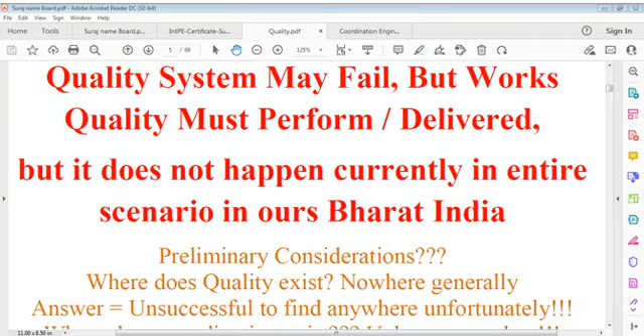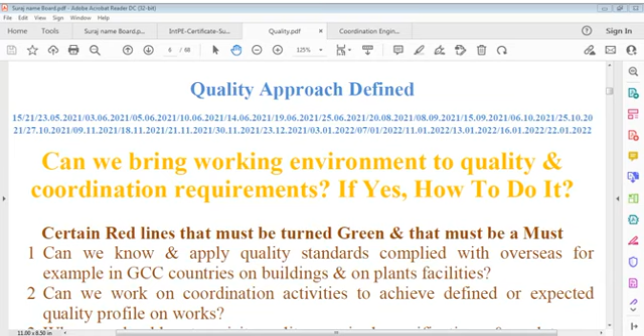Previously it was understood that the system is more important than quality, but time has told that no, there is a red line that we have to go. Can we bring the working environment to quality, the required working environment and coordination requirements? If yes, then how? So there are certain red lines that we have discussed before also. We'll keep on discussing them together, but the question is not here.

The question is something else. We have to link all this to, you can say, coordination and engineering. Coordination engineering, which everybody knows, meaning we know, but we do not know the reality of coordination. Coordination as a technical word, engineering word, or scientific word is very important.

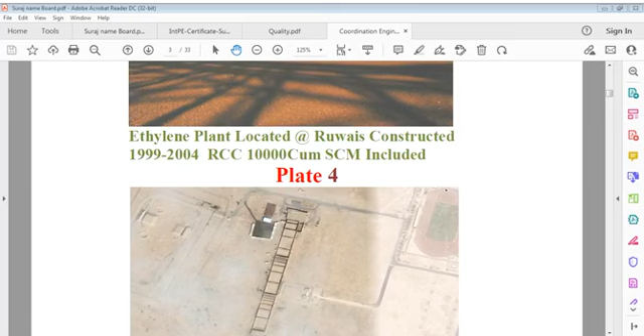So we have to learn the technical aspect first. And coordination includes the technical aspect, don't forget that. In this project there were so many elements. Now we go to this plate; I'll come back to other points. I put a sequence. Plate 4 gives the process area for the same project, same plant, and you can see in this process area there are many equipments and many areas available.

You can see these roads inside, and in certain parts there's the cracking compressor, the cracking system, or you may say also the wash water system. So many systems are available there; it's kind of an area with many groups of machines. And also you can see a water body called the seawater basin, a water body called the lagoon, and a water body called the outfall structure.

You can find so many buildings inside the process area, for example the central control building, and also electrical supply stations, that is main supply stations and sub main supply stations. And then there's a huge work of piping and pipe racks, and there are so many steel buildings in the same area. Steel building means having equipment indoors to protect it from the impact of weather.

Likewise, there's another part which is not seen here, that's the administration area and warehousing. This is only the process part, in which a multitude of utilities are also available, and off-sites also. So for me it was also a learning site. By chance I got many chances which I could not get otherwise at that age, and it was real work experience.

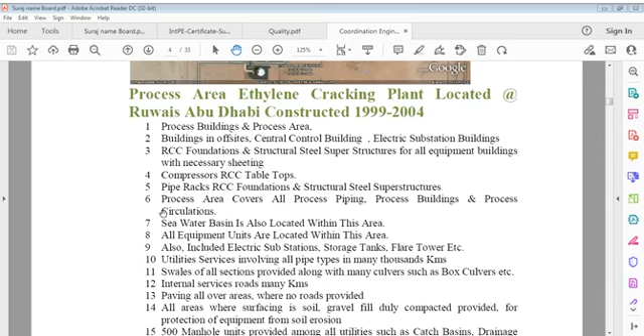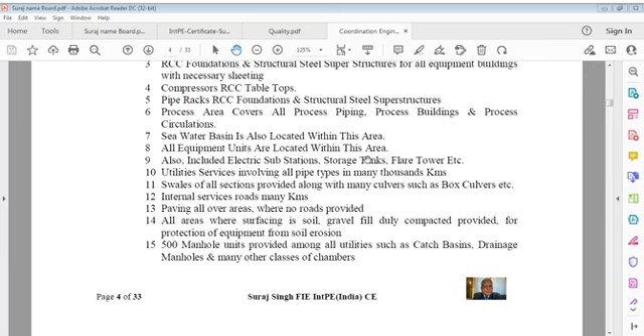The process area covers all process piping, process buildings, and process circulations. All these were there, and therefore it was important. The seawater basin is also located within this area. All equipment units are located within this area.

All utilities include electric substations, storage tanks, flares and the flare tower, and utility services involving all pipe types, many thousands of kilometers. Swales of all sections provided along with many culverts, such as box culverts. Internal service roads of many kilometers, paving all over areas where no roads are provided. All areas where surfacing is soil have gravel fill duly compacted, provided for protection of equipment from soil erosion.

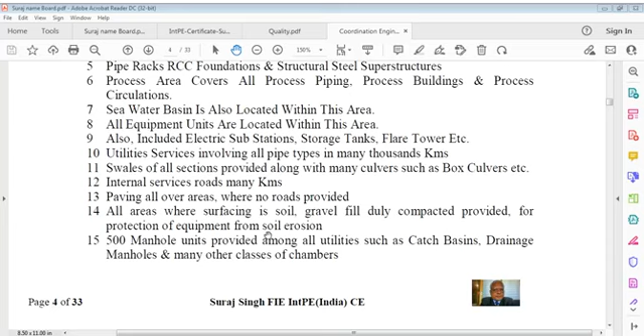And more than 500 manhole units; I don't exactly remember now how many. I personally dealt with shop drawings and all studies for these manholes. These units were provided among all utilities, such as catch basins, drainage manholes, and many other classes of chambers. So that's one.

This is also a processing unit, and there are so many buildings in this area which are very important. Central control, this is all process area, and there are some buildings here we call off-sites and utilities, and here, wherever processing goes on, that's on-site.

This has major foundations, massive blocks, independent footings, and likewise strip footings, depending on what building it is. And there is the compressor area here. In the compressor area is a cracked gas compressor, ethane compressor and propane compressor.

The seawater basin, which we'll discuss just now, and the electric substation buildings, likewise. And such tanks are there, major tanks, and many gases are involved to be stored in them. And there's a seawater basin here. There is a water lagoon here, and of course, the outfall chamber is here. A warehousing here, and you can say the administration block here. Likewise, this

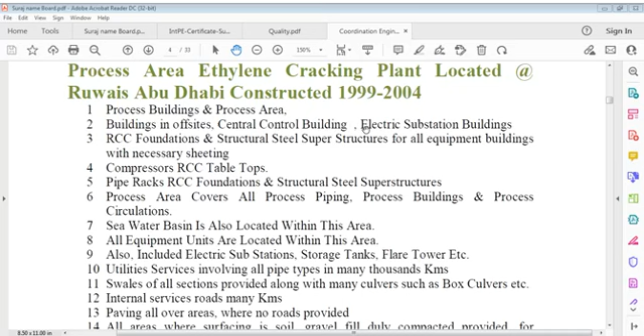just for information. And what's written here is process area, ethylene cracking plant, located at Ruwais, Abu Dhabi. I have told you that very limited contents are given, not full. You can say process buildings and process area means you have to deal with buildings while you construct something, and process buildings are very important, particularly in the process area where we talk about

blast. Blast is not written here, but it is very important. Blast means where there's some fire, some explosion during the processing stage. This blast can impact your structures and everywhere, and because of chemical process flow, there can be chemical fire as well. Because of chemical presence, it can break out into a new kind of fire, and the question is you will lose people, lose resources and everything.

So blast and non-blast buildings. In the process area generally buildings are blast buildings. Up to 200 meters it is a blast resistant building, and going beyond that, 200 to 600 meters, they are called intermediate buildings, or blast resilient buildings up to 600 meters, and beyond that, non-blast buildings. So just for information I explained that, we can refer to that one.

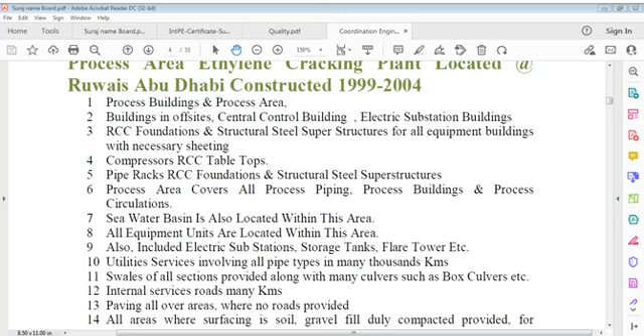Some knowledge is essential. So, the compressor tabletops: the top beam and foundation were very complicated, but we did that successfully. Then we have pipe racks with RCC foundations and structural steel superstructures. They can be precast also, or concrete, no problem. It depends on what you are going to do; that's the designer's choice.

Then the process area covers all process piping, process buildings and process circulations, and all elements installed and used in the process area. Piping is very important, process buildings are very important, and process circulations are also part of process area work. This is all done in a responsive fashion, and all equipment used is also located within this area.

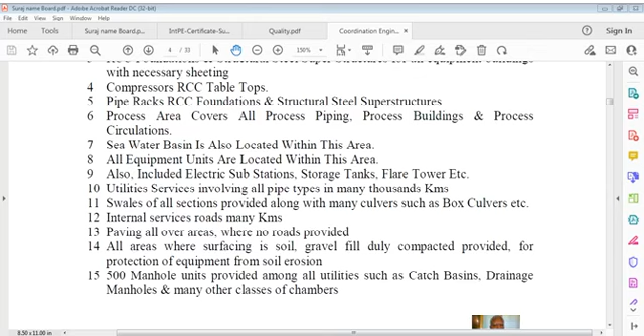What equipment we have to employ, and we can also include electrical substations for power distribution at different levels, as I said earlier. Hence, all equipment used is located in this area, including electrical substations, storage tanks, flare tower; all this is shown to you. You can see here.

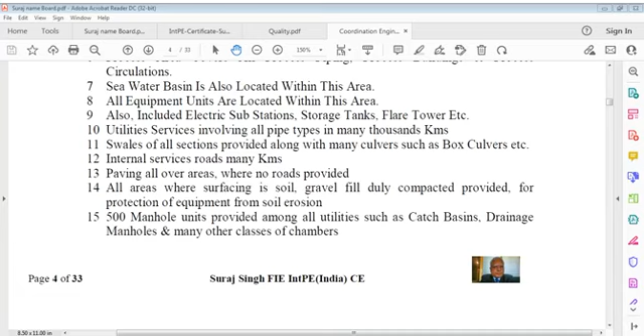Then the next plate, I think the first one is gone. We're talking of utility services, and it's a very important item. Utility services means all pipe work below ground, maybe above ground as well. Below ground we have drainage system, sewer system, gas system, or some other system, and you have to supply water.

There can also be chances of complications. Those complications must be avoided, because if not, it won't continue. If we don't take care of that, we may even burn our pump without knowing what the problem is.

We can say utility piping was such here that so many clashes happened among those services in comparison to the foundation of that area. In many cases designs were revised, in many cases coordination was changed.

So we have utility services, which is a very complicated part: electrical service, water supply, sewer service, catch basins, drainage. There were ductile iron pipes, GRP pipe, GRV pipe, and also concrete pipes; stoneware pipes were not included.

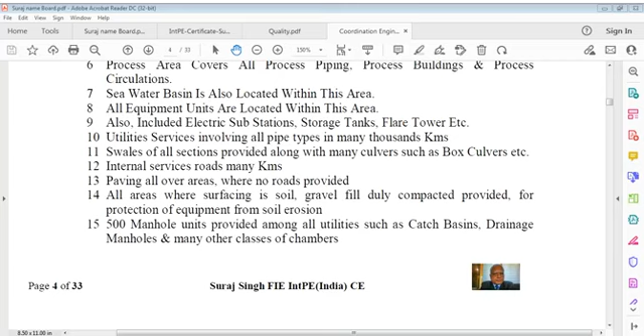So these are the points that I've discussed at length, and I have played slide 6 here. It's a swimming pool plate. Sorry, not swimming pool, sea water basin. I used to say swimming pool because I constructed a swimming pool.

I'm feeling cold now, I don't know why. Maybe it's cold outside. Let me see the temperature here, for example Haryana. Now it's 1 degree down. When I started at 3:30 it was 12 degrees, now it's 11 degrees, and humidity is 96%. Day temperature is 16 degrees, night time showing 6 degrees. Well, no problem, let it be. Waste of time, just come to the point. Let me wear my coat first. It's better than getting cold.

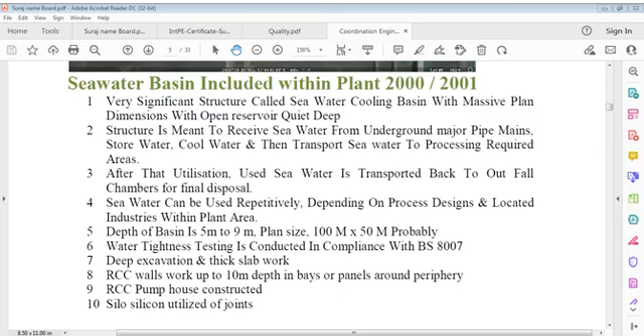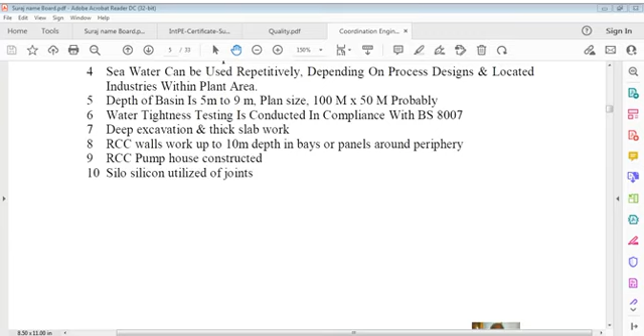The joints are to be made of silicone material, chemical material, and that's the specification of this. So you can quantify how much it is. It's very much quantity. I forgot to write it, but it can be 5,000 square meters area. If you take a 40 centimeter base slab, 5,000 square meters gives 2,000 cubic meters. And the walls are 300 meters periphery, forget the pump house, about 40 centimeters thick.

So 300 into 0.4 is 120 square meters, into depth, let's say 6 meters average, or even more, say 7 or 8. So 120 into 7 or 8 is around 1,000 or 1,200 cubic meters of concrete in that.

It's a good quantity. And then the pump house likewise, and the quantity of water itself, you see how much that is. Let's say 5,000 square meters into 5 meters, or even if you keep 4 meters, it shall be 20,000 cubic meters.

So 25,000 cubic meter storage of water. It's a big one, and you can say cubic meter, that is. Whatever it is, quantity is not a big issue. Here the question is what to do, how to do it.

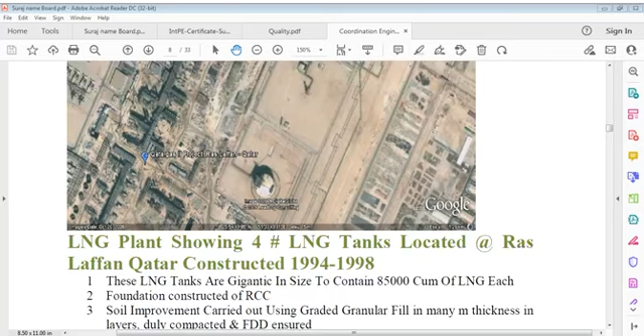Well, this is the LNG project, and I was an office engineer on this project in 1994 to 1998, I think. LNG plant showing 4 LNG tanks located at Ras Laffan, Qatar. LNG plant, liquefied natural gas. So in Ras Laffan, I was associated with Mid-Mac, who was a consortium member. We worked together with them on the site.

It was important; in fact, these LNG tanks are gigantic in size, to contain 85,000 cubic meters of LNG each tank. Foundation constructed of RCC. Soil improvement carried out using graded granular fill in layers, duly compacted to the required FDD,

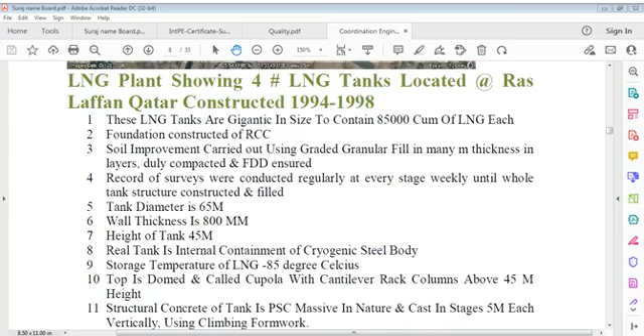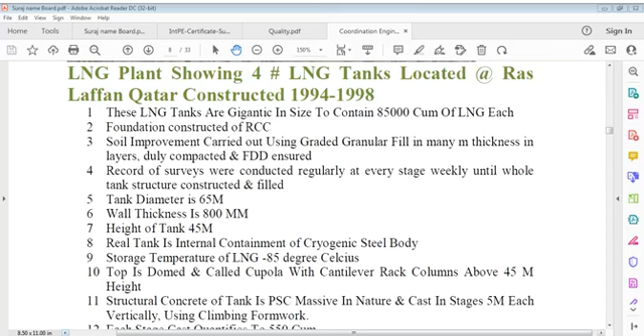And with cantilever rack column, and above 45 meters in civil practice. We have here, you can say, structural concrete of the tank is pre-stressed concrete as well as reinforced concrete, that is structural concrete. Tank is PSC, massive in nature and cast in stages of 5 meters each, and vertically, using climbing formwork.

Here each stage cast quantity is 550 cubic meters. Wall casting, talking of wall with climb form, climbing jump form. Each height is 5 meters. They were casting a slab also, roof slab, which we did not mention. This casting of roof slab is important. And the point is safety instruction.

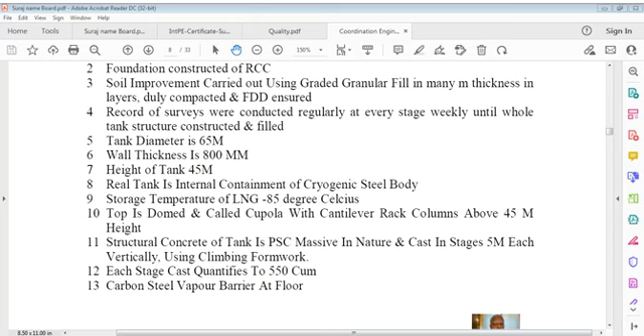It's an interesting one, just to know some statistics about that. Each stage quantity, as I said, 550, walls, carbon steel vapor barrier at floor, and we are going now to this engineering world, just to know what it is, how it works. Yes, engineering world, how does it work, how shall it work, what's the purpose? We have to know this in fact.

Last time I talked of certain procedures which we have to do during construction or during execution stage of contract. Coordination is a very complicated activity, not in a sense that it can't be done, in a sense that we have to understand what is coordination. We have to understand what is coordination, how does it apply, how does it work, and where we have to take care of this.

Now, for that purpose, I had referred you to some procedures, which I will again go to before moving on, because this is a very detailed statement I am making. That is coordination process, coordination requirements, communication process, communication requirement.

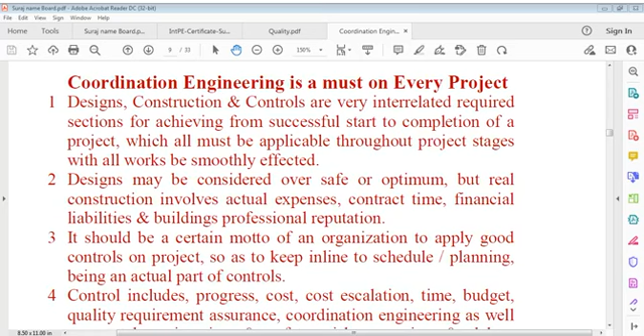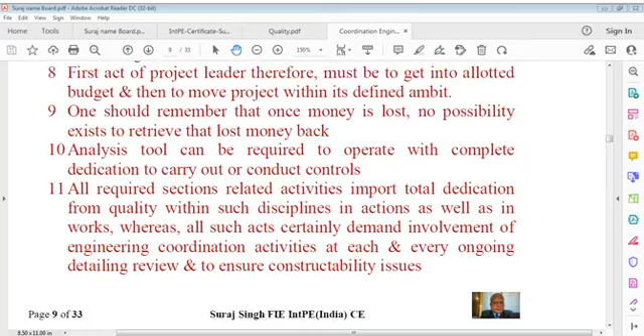Likewise, what grade of other items, what quality items you want, you have to give specification requirements that make quality in itself. Your specification speaks of quality, and that's a really important item. So I try to elaborate on bill of quantities, and I try to elaborate on specifications, and this is a very important part of the project, because this makes the quality system, and we cannot just run away from that.

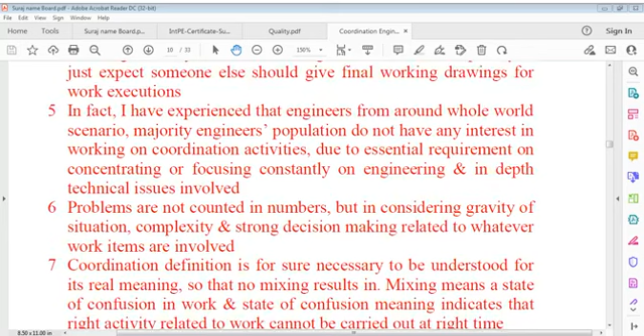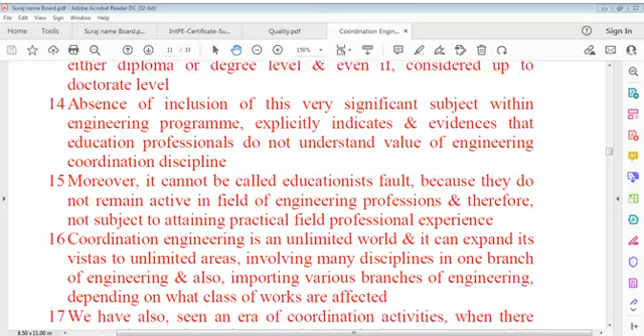Last time I explained something about this, so I'm just now browsing. Many people don't understand what coordination is, but it's not a question of whether they understand it or how to do it. Coordination cannot be avoided. It's a practical part of projects. So if you try to avoid that, you try to avoid the project itself. We claim that in the absence of coordination, you cannot do anything. That's also true if you're an experienced engineer.

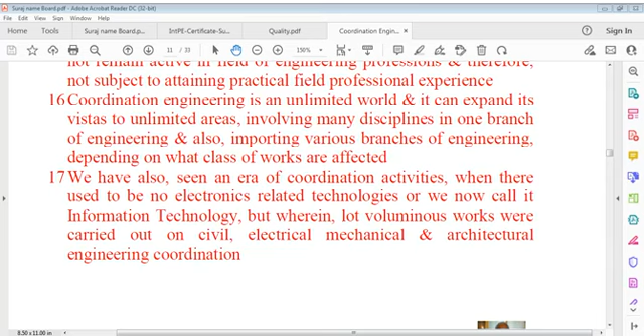You have to do that, because coordination engineering is an unlimited world. It can expand its vistas to unlimited areas involving many disciplines in one branch of engineering, and also importing various branches of engineering depending on what class of works are affected. We have seen an era of coordination activities when there were no electronic technologies, what we now call information technology, IT, but wherein large voluminous works were carried out on civil, electrical, mechanical, and architectural engineering coordination. And that's very beautiful.

You can say coordination engineering has achieved growth, but we don't have coordinating system engineers, we don't have coordinating systems professionals. That's a requirement of the time. In that era, works of coordination were very time consuming, due to the fact that even drawings used to be manually drafted, but that time has gone now. That's history. Now drawing is not that difficult, but understanding of details is a question mark.

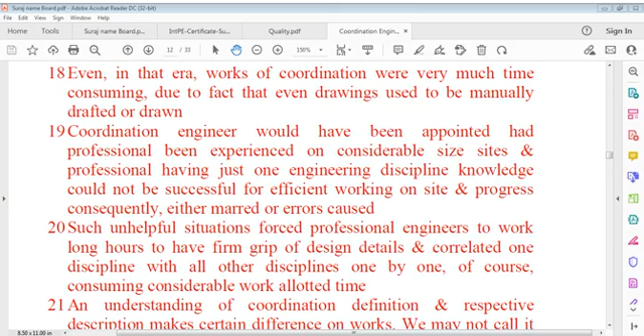A coordination engineer would have been appointed had the professional been experienced on considerable size sites, and a professional having just one engineering discipline's knowledge could not be successful for efficient working on site, and progress was consequently either marred or errors caused. Such unhelpful situations force professional engineers to work long hours to have a firm grip of design details and correlate one discipline with all other disciplines one by one, of course consuming considerable allotted work time.

So an understanding of the coordination definition and respective description makes a certain difference on works. We cannot call it teamwork. Certainly, I don't say it is teamwork, because coordination cannot be done effectively by a team, but certainly by perfectly getting through all related details available in schematic designs as well as other documents, and of course prevailing professional market conventions, or so-called good industrial practice.

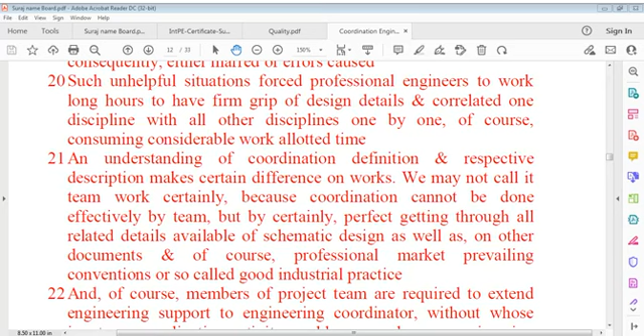Members of the project team are required to extend engineering support to the engineering coordinator or coordination engineer, without whose input no coordination activity would move. The engineering professional involved in every coordination has to consider personal involvement in every provided information for the purpose of corroborating ratification or providing corroborated information based on total scrutiny as well as investigation. The question is the coordinator. What is coordination? What is the specification of a coordinator? Is it only that you have to coordinate or to put something

or whosoever? And if that time is limited and I cannot afford it, in that case I can propose my solutions. I can say, okay, we want to do this. But for that, you have to see that your budget is not exceeded. Whatever provisions you have made in that item should not be exceeded. So you can say, okay, this was a requirement or this is a confusion. Either I clarify which of these three clarifications is to be done, or you provide your clarification, or you instruct us what to do.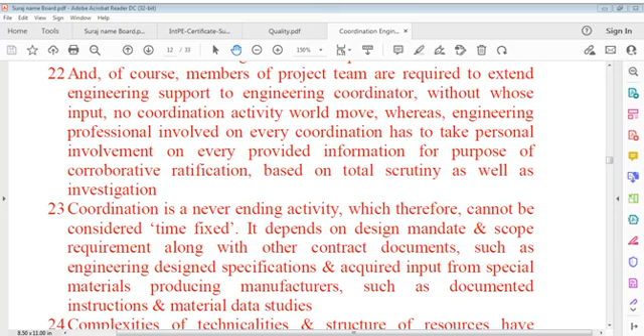And that's why I'm saying coordination is part of design. It's more than designs. It supports designs, or it overarches designs. Even sometimes designs are part of coordination, because the designer has to coordinate what's to be done and not to be done. So I can say coordination is a never-ending activity, which therefore cannot be considered time fixed.

We cannot fix time for this activity because always new information arrives, and it depends on design mandate as well as scope requirement along with other contract documents such as engineering design specifications and acquired input from special materials producing manufacturers, such as documented instructions and material data sheet studies. I repeat this point. Coordination is a never-ending process. It continues always, even if sometimes it's not seen going on. It goes on and on.

In terms of office work, a person as a coordinator keeps on working all the time, keeping an eye on what's coming in and what's gone, and what are the pending activities, keeping all the balance. That person knows what's to be done, because he doesn't coordinate only technical, he coordinates contractual coordination as well.

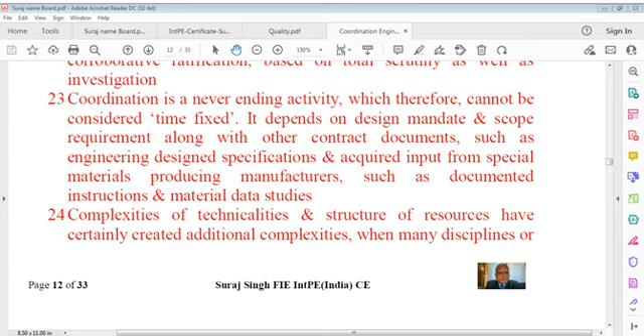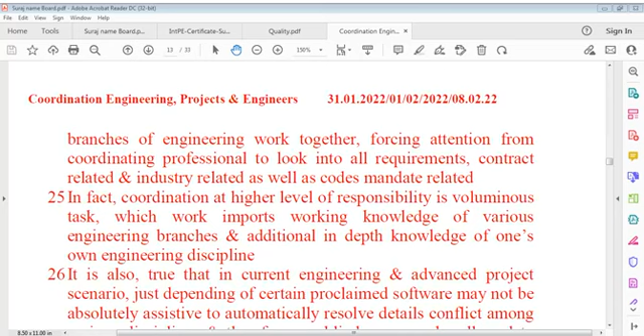So you can say coordination is never-ending activity which therefore cannot be considered time fixed and depends on design mandate and scope requirement, along with other contract documents such as engineering design specifications and acquired input from special materials producing manufacturers, such as documented instructions and material data sheet studies. Complexities of technicalities and structure of resources have certainly created additional complexities when many disciplines or branches of engineering work together, forcing the coordinating professional to look into all requirements, contract related, industry related, as well as codes mandate related.

In fact, coordination at higher level of responsibility is always a voluminous task which imports working knowledge of various engineering branches, and additionally in-depth knowledge of one's own engineering discipline. This is also important where something is impacted upon animals or non-human creatures. That can also cause a problem if they don't understand anything. They just want to enjoy life and eat and drink, sleep.

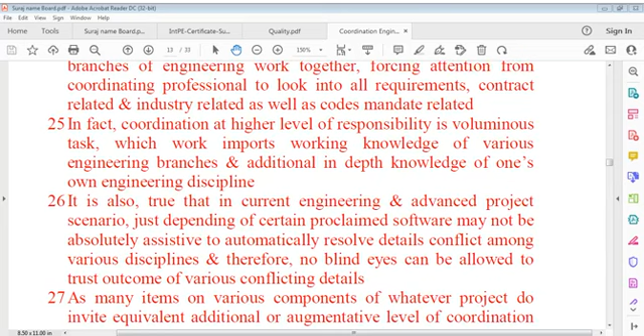And so it's also true that in current engineering and advanced project scenarios, just depending on certain proclaimed software may not be absolutely assistive to automatically resolve detail conflicts among various disciplines, and therefore no blind eye can be allowed to trust the outcome of various conflicting details.

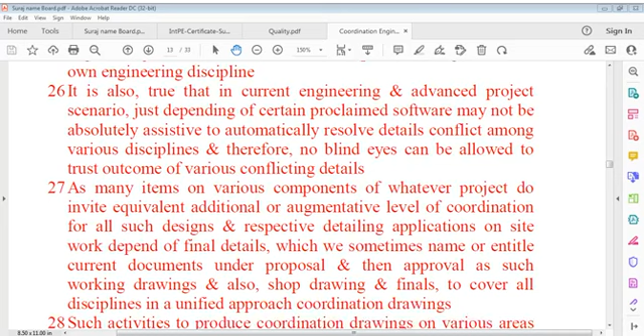It's only coordination, engineering coordination or technical coordination, or you can say on site what happens, they have to decide. There can be equivalence, as I said, in items. As many items on various components of whatever project do invite equivalent, additional or augmentative level of coordination for all such designs and respective detailing.

Applications on site work depend on final details, which we sometimes name or entitle current documents under proposal, and then approval as such, working drawings and also shop drawings and finals to cover all disciplines in a unified approach, coordination drawings.

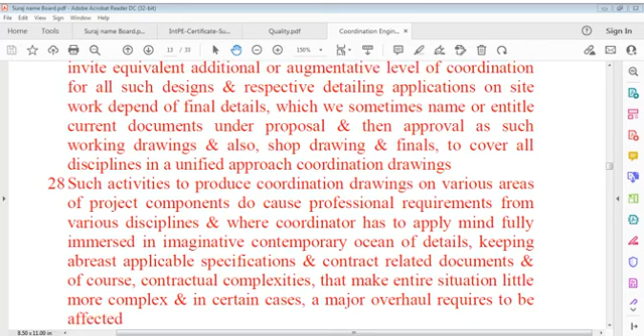Such activities to produce coordination drawings on various areas of project components do cause professional requirements from various disciplines, where the coordinator has to apply mind, fully immersed in an imaginative contemporary ocean of details, keeping abreast of applicable specifications and contract related documents, and of course contractual complexities that make the entire situation a little more complex, and in certain cases a major overhaul requires to be effected.

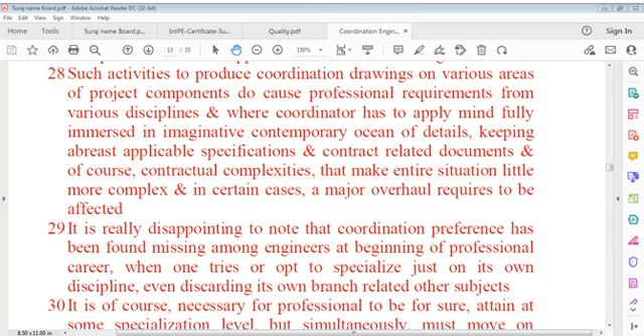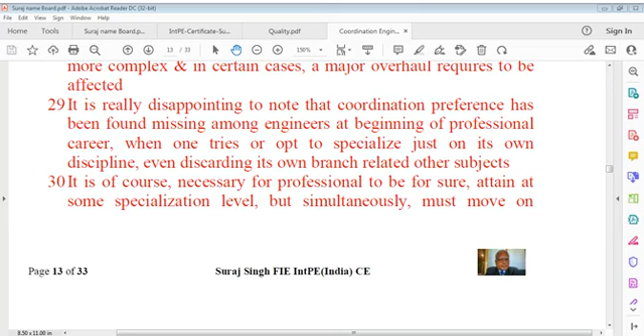It's really disappointing to note that coordination preference has been found missing among engineers at the beginning of their professional career, when one tries to specialize just in one's own discipline, even discarding one's own branch related other subjects. Of course, it is necessary for a professional to attain some specialization level, but simultaneously must move on a parallel track with the remaining disciplines, and certainly try to join other overlapping engineering branches.

Now, first of all, for contracts, because these are all parts of contracts, we should know the contract base. What is a contract? We know what a contract is, but its legal implication we don't understand. Engineers have to understand that. They know there exists a contract. Maybe they use it, but whether the contract is perfect or not, that must be evaluated. Because sometimes those who never worked in the field, but only in the design section, there will be something for them in a different way. We'll take that up later on.

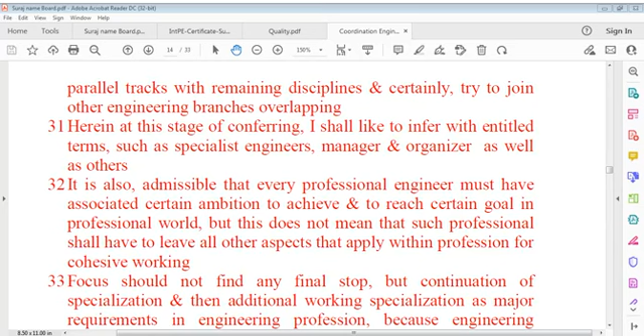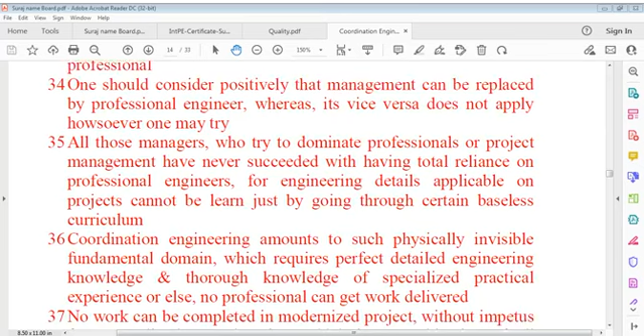Now, focus should not find any final stop, but continuation of specialization and then additional working specialization as major requirements in the engineering profession, because engineering cannot be replaced or overtaken by any other non-engineering professional. One should consider positively that management or organization can be replaced by a professional engineer, whereas vice versa does not apply, however one may try. And all those organizers and managers who try to dominate professionals or project management have never succeeded with total reliance on professional engineers.

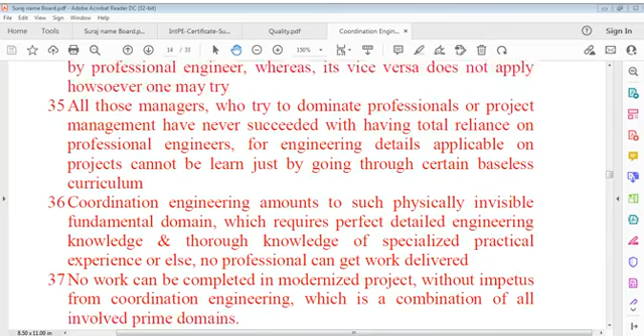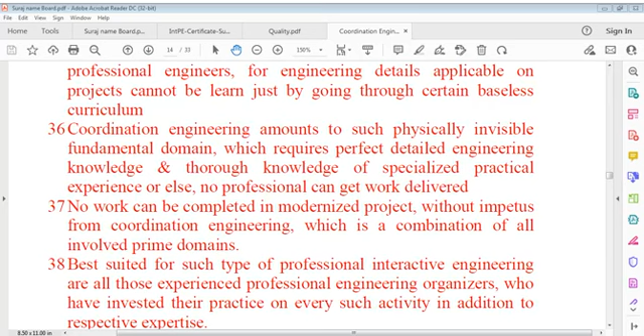For engineering, details applicable on projects cannot be learned just by going through a certain baseless curriculum. Coordination engineering amounts to a physically invisible fundamental domain which requires perfect detailed engineering knowledge and thorough specialized practical experience, or else no professional can get work delivered. No work can be completed in a modernized project without impetus from coordination engineering, which is a common combination of all involved prime domains. Best suited for this interactive engineering area are experienced professional engineering organizers or those who have invested their practice in every such activity, in addition to respective expertise.

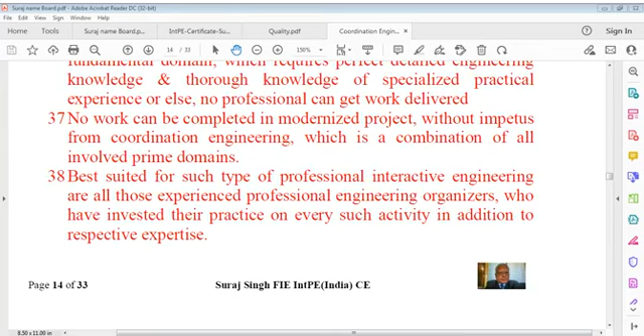In fact, currently coordination is like a super domain for which an ordinary educated engineer, let me repeat, I missed by chance, light interfered. In fact, currently coordination is like a super domain for which an ordinary educated engineer cannot best suit in. But if one has got multi-level experience, one can perform such tasks efficiently, it can be said sufficiently.

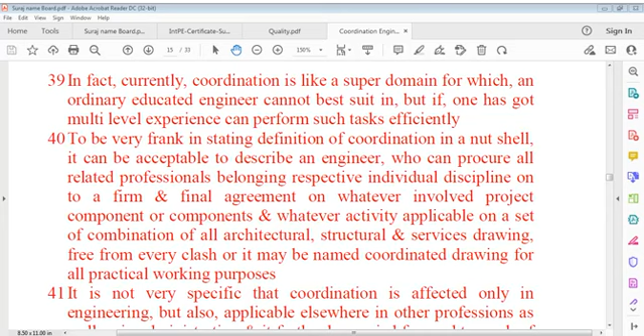To be very frank in stating the definition of coordination in a nutshell, it can be acceptable to describe an engineer who can procure all related professionals belonging to each respective individual discipline onto a firm and final agreement on whatever involved project component or components, and whatever activity applicable on a set of combined architectural, structural and services drawings free from every clash, which may be named coordinated drawing for all practical working purposes.

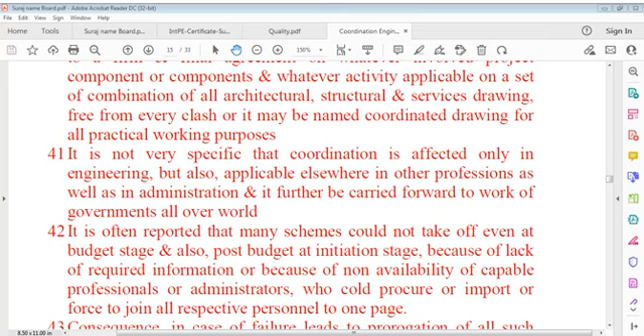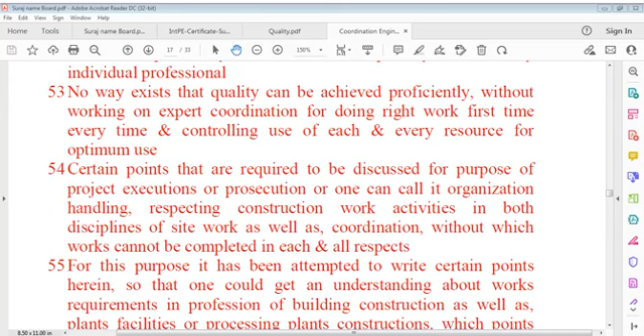So my dear friend, I used to say that we have to be very logical, and we have to be very, very pragmatic in our approach. We have to be very pragmatic in everything we say.

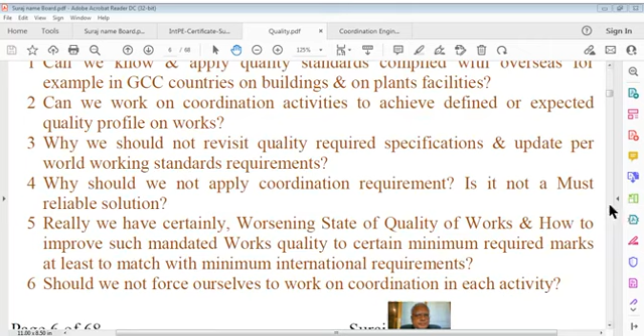And here is my certification of competency as a professional engineer, international professional engineer. And here's quality file as well as what I'm talking about. And it's very interesting to note that quality is an important part of life. It cannot be avoided. In fact, it's question mark here, and that's why I'm saying this is in blown form.

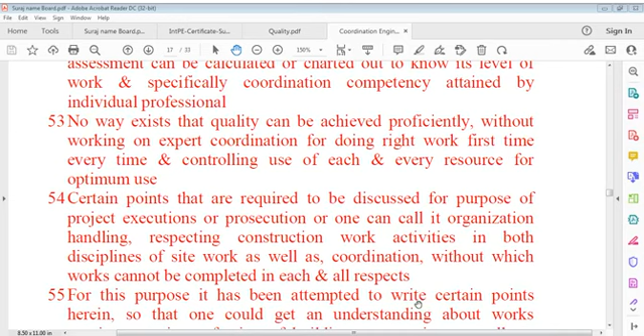I understand. I try to explain today also projects that I was involved in and some information about those projects in part of coordination engineering. From here to there, you can say we got that one.

So it doesn't matter or not matter. Let's just see what we're doing. Life is life and work is work, and we have to see things go like that. No. It's therefore very important from this point of view. We have to understand this, and let me see what's the condition of weather. Just a minute, please.

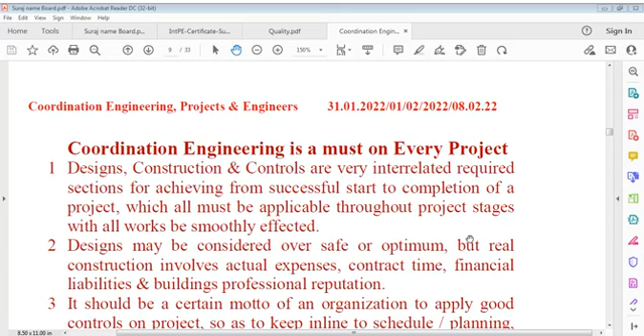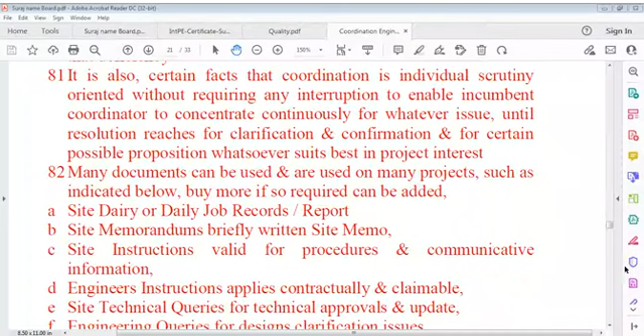I listed it out, it's there. We can say it's a list of documents here. We can just read it now. You can say many documents can be used, and I used many in projects, such as indicated below, but more, if so required, can be added.

So it's site diary or daily job records, reports, site memorandums, briefly written site memos, site instructions valid for procedures and communicative information. Engineer's instructions apply contractually and are claimable. Site technical queries for technical approvals and updates.

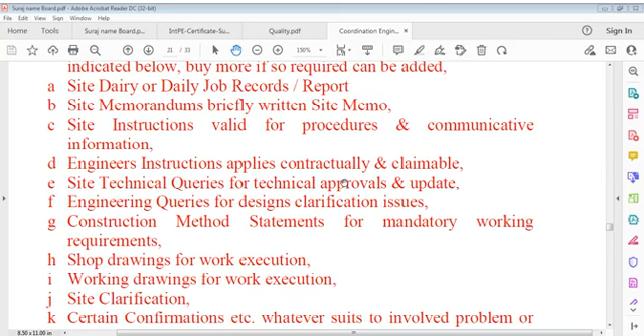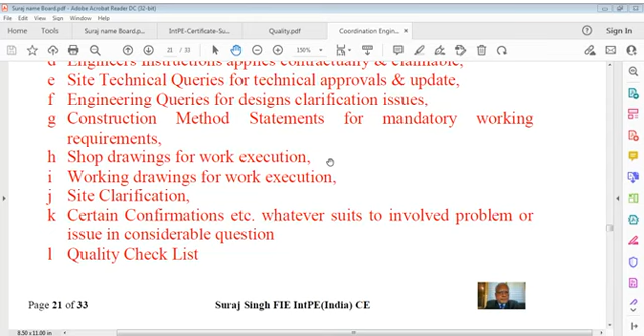And you can say engineering queries for designs and clarification issues, construction method statements for mandatory working requirements, shop drawings for work execution, working drawings for work execution, site clarifications, certain confirmations, whatever suits the involved problem or issue

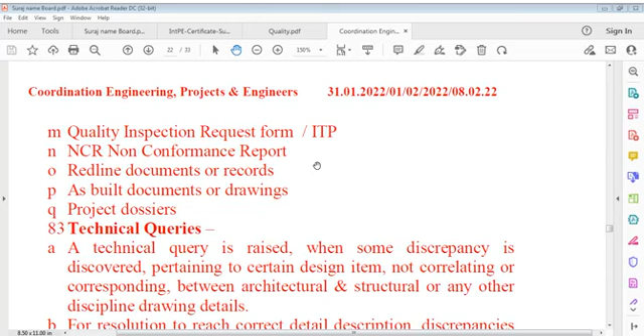in question. Quality checklists, you can say quality inspection request forms, NCR, non-conformance reports, red line documents or records, as-built documents or drawings, project dossiers, and many more shall be added later on.

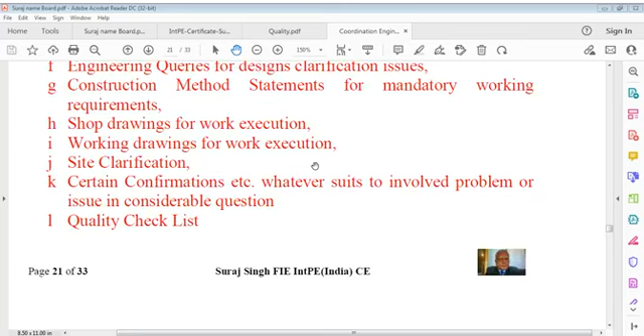Site diary or daily job record is very important for everyday activity. You cannot just run away from this. You have to record it daily so that it can also be a reference in future. Some disputes come in; though it's not legally applicable, it's a record which cannot be compromised. The record always speaks.

This is a logistic document. You can say it doesn't give any claim. It's a logistic document, just listing what happened. It depends on what we record in it, what instruction goes to the site agent or a consultant, or what should be on record. Question marks are there, where issues are there. You cannot just skip those issues.

It's therefore very important. We will take up this document's requirement later on also, because it's something very different, very important, and we have to care about it. So we'll take this up at some stage, and we have to take all of the documents.

And we have to use material approval requests that are not listed in here. I'll list that one also. Material approval, drawings approval, and material supply status, or we can say many other such statuses. So many documents, as I link to my previous records, my publications.

It's not a very eminent publication, it's just an ordinary publication because it was not given due regard. It was not received well by people. Because I think professionals themselves don't like professional books, so that's the problem. Professionals in engineering do not respect writings, they don't respect their own work, and they have a different mindset. I don't know why they are interested in textbooks, what's the reason behind that.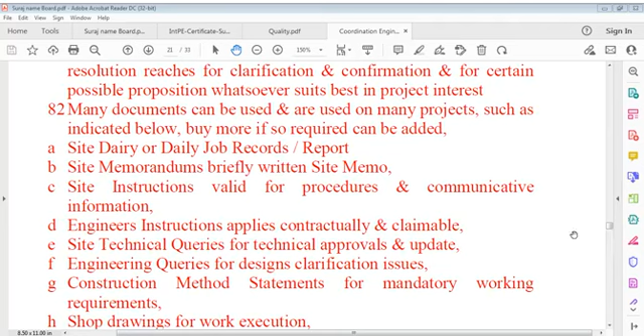But my intention was to bring to you what is important, and this coordination issue, which is not new but practically very, very important now from this point of view or that point of view, for engineers, for reliable quality engineering works that deliver a professional note. It is projects and engineers, and we can say engineering projects or coordination engineering; both are important.

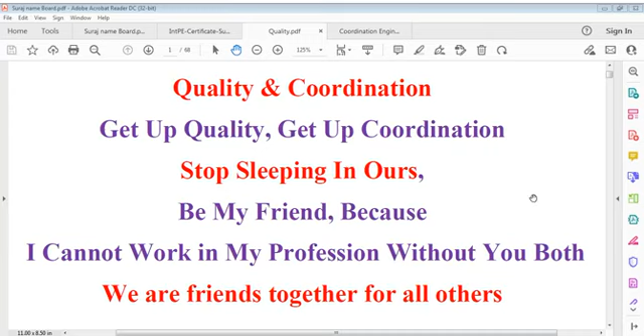Same way, this file, which is quality and coordination, is also very important from every viewpoint, and that in fact Bharat, India, speaks about, means we speak about. It's very important as well. And here is certification.